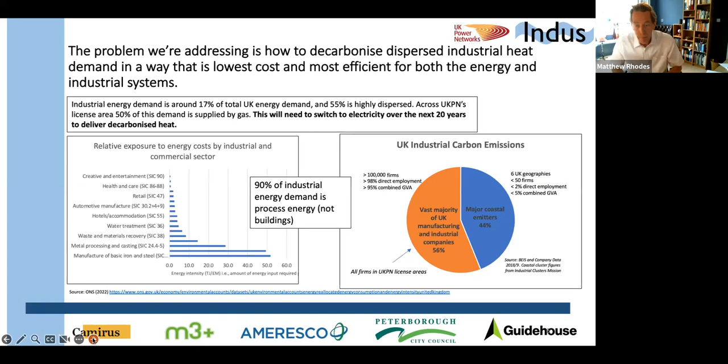So I'll hand over to Loukas now to give you UKPN's perspective on this problem. Thank you, Matthew. I think Matthew pretty much covered the challenges from a network perspective. If you have all the sites decarbonizing in isolation, then this is going to have a huge impact on the networks overall. And as a network, we are trying to be key enablers in the energy transition and not blockers. We don't want to say no to customers when they are asking for capacity for a new development or for an upgrade in an existing development.

So Matthew is going to talk to you about the Indus solution in a bit. At high level, it's going to be an offering from UKPN to industrial customers and developers to offer a path to decarbonization. But at the same time, it will be something that we're going to incorporate in our processes internally. So where we identify a requirement for a more coordinated industrial solution because of the Indus solution, the investment needs will also be incorporated in the planning processes, and we'll know how to deal with the increased demand over the next few years.

So we're talking about a product that will involve multiple parties. So it's not only the DNO process we need to understand, but also the requirements and needs of industrial customers and industrial developers. We also need to understand the challenges from the local authorities' perspective, and we are trying to get all the people involved in such a solution in the project in the alpha phase to have a holistic approach. So that was from me.

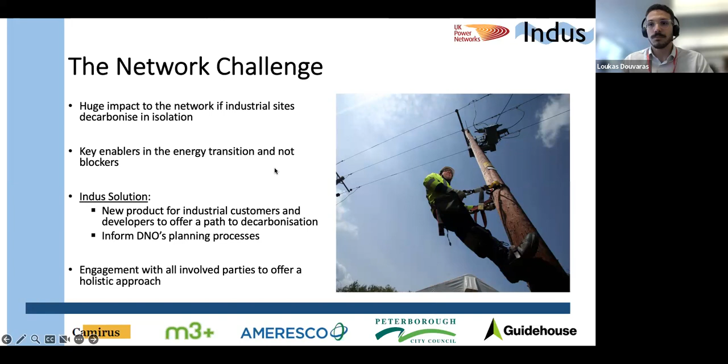I will pass over now to Matthew because I believe that Hannah had some issues with connection. So if we move on to the next slide, yes, I think it's probably Hannah trying to call me a minute ago to say that she was having issues.

So we've been doing this project focusing on Peterborough, Peterborough City Council as a local authority area, because as I'm going to explain in a moment, the strategy is to try and actually do one of these developments in a very specific place. So it's very important we engage with the local authority. Peterborough is a really good choice because they have declared a climate emergency. They've gone quite a long way down the energy road in terms of a local authority understanding the issues. They've got their own solar farms and so on. So they're very into this agenda in general.

They're also a growing economy with space to grow with some fairly meaty industrial activities. So there's a domestic appliances factory, Whirlpool, and Perkins Engines well established in Peterborough, and lots of growing industrial activity. So we've worked very closely with Peterborough throughout the project, and they're very, very supportive and enthusiastic about it.

It's a pity Hannah can't be here to say that herself, but she would have said something along those lines. So let's go on to the next slide.

Okay, so I'm now going to give you an overview of what we've actually got up to in the project, where we've got to, what the next steps are and how we hope to take it forward into alpha. So if we go on to the next slide. So we presented the problem in terms of a high-level challenge of decarbonising this particular demographic, these dispersed industrial sites across the licence area, and there are tens to hundreds of thousands of those across the country.

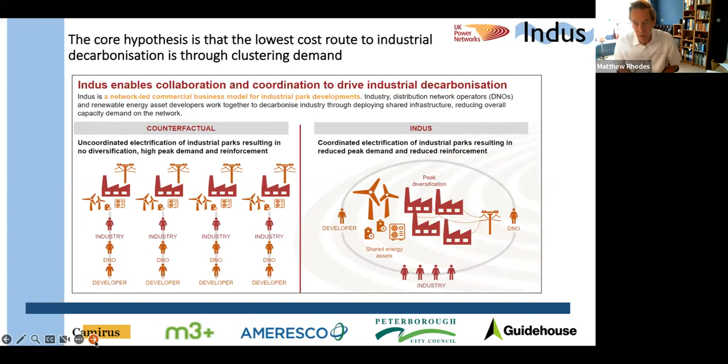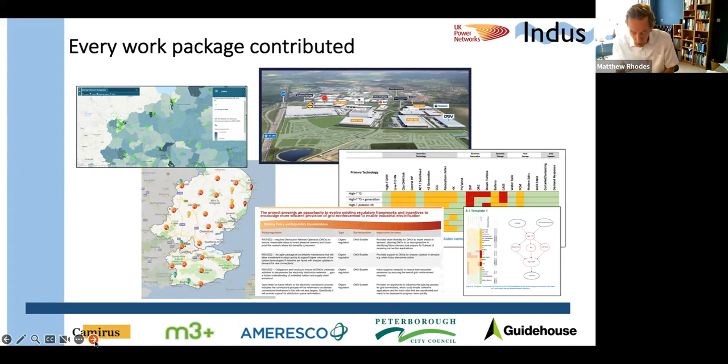The discovery papers have been really helpful to this project, and we've moved quite a long way without actually changing the core of what we're trying to do. So we're trying through the whole SIF process, if we can get to the alpha and beta stages, to actually intervene in one of these industrial developments.

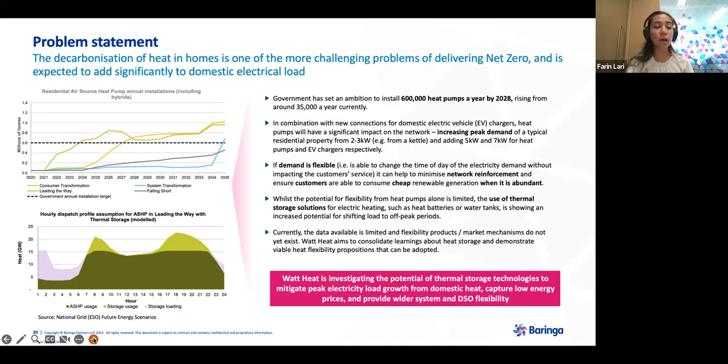More specifically, within the discovery phase, we wanted to, first of all, consolidate the data that already is out there, look at the technical feasibility of some of the technologies, old and new, that are in the market, and what level of flexibility they can provide, and understand the business case for this technology. That is really what is the value to the system and to the customers that these technologies can provide, and are they worthwhile for domestic customers. If we could go to the next slide, Hannah will take us through our approach. On to you, Hannah.

Hello. So yeah, as Farin said, we thought about a number of technologies as part of Watt Heat, including heat pumps with smart hot water tanks, but also more novel solutions like large space heating primary thermal stores, which are effectively just really big hot water tanks that allow you to shift your space heat demand as well as your hot water that you use for showering and stuff.

But we also considered especially innovative technologies like Tepeo's zero emissions boiler, which, because it has the storage capacity to store a whole day of space heat demand overnight, can fully offset the power draw from heating away from the electrical draw, whilst it also has another benefit of being a direct replacement for a conventional gas boiler. So some of the challenges for heat decarbonisation are overcome by that too.

So when we were going about modelling this, we thought about separate heat and hot water storage capabilities, which was really important so that we could consider the difference between a peak winter day when it's super cold and your space heating's at its maximum, but also the more classic day, for instance, today, where you're probably just going to use hot water and not even think about turning your heating on.

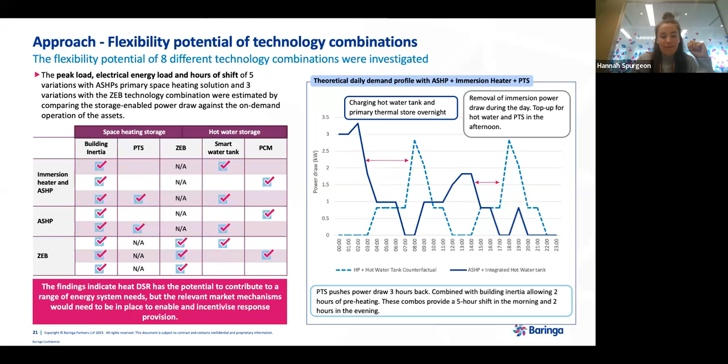Like Hannah mentioned, we assessed that there is great flexibility potential with these technologies, but there's also obviously a cost attributed to each of the technology combos, especially the ones that provide a larger amount of flexibility. And now to create a business case and incentive or any package that makes these combinations attractive to customers, we need to understand what the value is in terms of revenues, bill savings, and overall system benefits to really incentivize all the different parts of the value chain.

So to do that, we looked at each of the technology combinations first separately, and looked at the savings that can be achieved per household by taking advantage of time of use tariff through the flexible operation of the assets like Hannah just explained. In addition, we looked at the potential for the technology in participating in value streams such as DSO sustain.

TOU and DSO sustain together already provided a robust revenue and cost saving stack for the customers, but we went a step further and looked at the potential upside from dynamic curtailment and capacity market participation through aggregation that could really increase that revenue stream further. Our analysis showed that for all of the technology combinations, there's a reasonable payback period of something around 10 to 12 years for the most expensive cases and below.

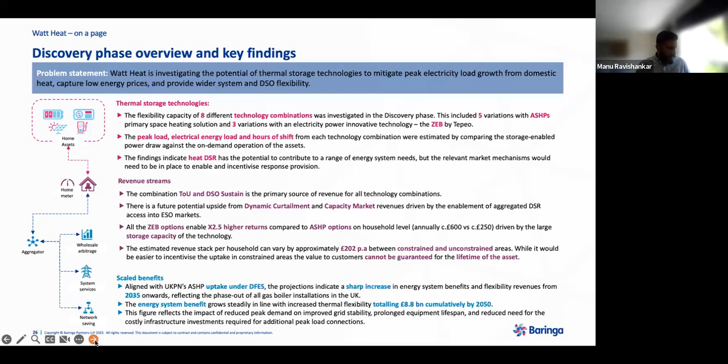Super. Thank you so much, Hannah. Yeah, great presentation. So I think I'm still waiting on questions from the audience. So maybe I'll kick off.

Just as a clarification question, really. When you talk about flexibility provided by thermal storage, do we mean the thermal storage itself charges, or do we mean the heat pump or the zero emission boiler operating flexibly to change the power load, and then heat is stored so that there's a smooth heat output, but then the power output? Just for clarification so that I understand.

Yeah, exactly. That's how we modeled it. We modeled it on the assumption that the heat demand of the customer is not changed, the power draw is changed. So the basis of our design was not compromising the heat demand of the customers.

Understood. So just maybe then a follow-on question. I guess you had a list of heat pumps, a zero emission boiler, etc. In terms of their own flexible operation, have you considered their capability to modulate as a factor in your criteria assessment? Can you clarify what you mean by that?

So if you're not running the heat pump on the same output, you're moving the heat pump load up and down, or if you're running the zero emissions boiler or something else, I guess all of the technologies have slightly different ways they deliver heat if you modulate them, or their lifetime, or their cost of operations or maintenance. Is that considered in your assessment?

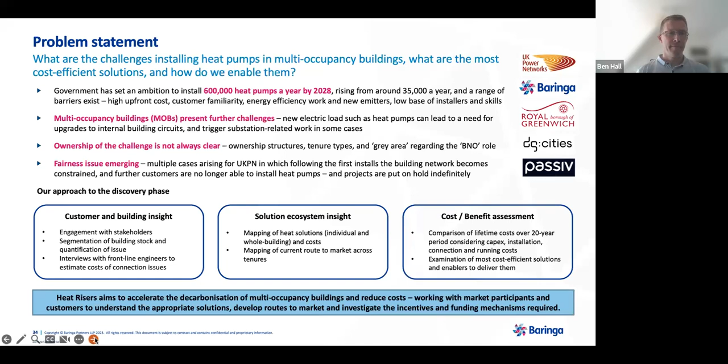So for us to properly understand the problem space, as Ben touched on there, it was really important to understand the property stock in UKPN's area. So we looked through loads of census and English Housing Survey information to work out just how many multiple occupancy buildings there were.

We and the census and English Housing Survey break down multiple occupancy buildings to be low-rise purpose-built apartment blocks, so that's anything 6 or less floors high, and also high-rise purpose-built flats, which is anything larger than that. And the final area was converted flats, which is basically a terrace property which was built as a whole house but later converted into many flats. So they're really prevalent in places such as London.

These types of properties make up 25% of housing stock in areas that UKPN serve, or 3.5 million dwellings. So if the problems of network challenges are going to be prevalent across a large amount of that building stock, it's obviously a really big area and a really big barrier for heat decarbonisation.

So once we had an understanding of the scale of the properties in question, we started having some really useful conversations with some of the area managers at UKPN about how common the building network constraints were, which turned out to be very common in multiple occupancy buildings.

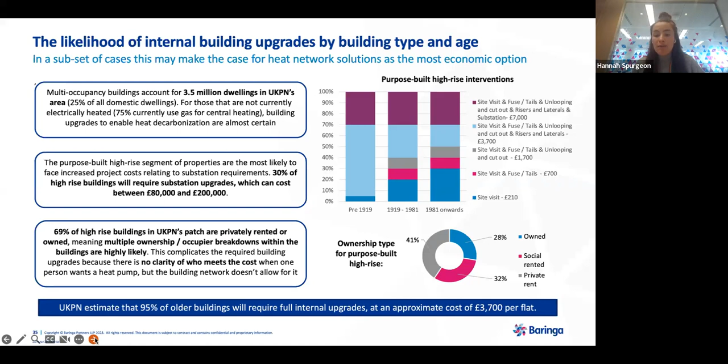It's worth noting that in social housing, the barriers could be slightly smaller because there is usually one owner, usually the local authority, and also communal level heating systems are installed more frequently, which could help to bring down some of the building upgrade costs, which I'll touch on in more detail in the next slide, if we could switch over, Manu.

So now we'd worked out that individual heat pump installations are likely to cause all these network problems, we also wanted to see whether other heat decarbonisation tech could allow for some of the costs to be reduced. So one of the solutions we explored was a coordinated rollout of air source heat pumps, which is where an entire multiple occupancy building would be decarbonised for heating in one go, and therefore you could also upgrade the entire building network at the same time.

Which enables, through buying heat pumps en masse, a reduction in the upfront capital for those technologies, which helps offset some of the connection costs. And our lifetime cost analysis, which considered the upfront and running costs over 20 years, indicated that this solution was often the most financially viable solution to still allow for heat decarbonisation in these multiple occupancy buildings.

However, you still have large barriers there of getting the engagement with the community and getting the works done, and who meets the cost of the internal building upgrades. We also considered ground loops, thinking that they might be really great, where a shared ground array allows for heat to be produced slightly more efficiently, though these are really expensive upfront and still require the building upgrades because you still need a heat pump of the same size within each property, which means that they had a very limited benefit with regard to cost.

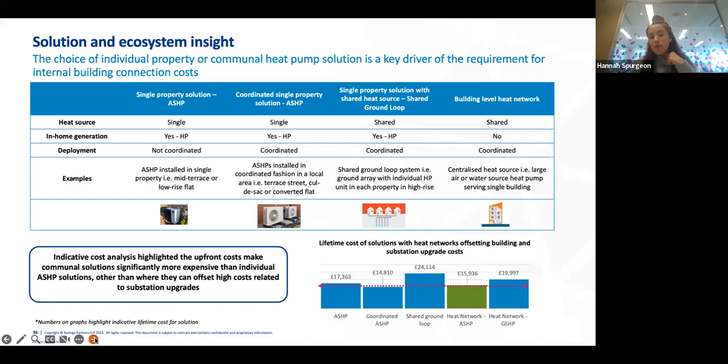Thanks, Hannah. So last slide. A lot of work's been done, but just to try and sum up very quickly, a bit of an eye-opener that most multi-occupancy buildings will require some form of internal intervention if you're upgrading from gas heating to electrified air source heat pump heating. In some of the older buildings, that can be quite considerable. We saw upwards of £3,000 per flat, and even more if you take into account substation interventions that can happen, some of which can be inside some of the large buildings.

Given that upfront cost is already a barrier and this can add 30% more, we're seeing that being a tipping point. We've got a number of examples, as Hannah mentioned, of projects that have been shelved. I mentioned the fairness challenge in the intro, but some of the reason this has come up is customers beginning to raise complaints with the network around how they can't have their heat pump because others have already got them, and that's not fair. If you play these challenges out and run the numbers together, going back to the policy target of 600,000 a year, applying that to UKPN's patch, potentially 1 million heat pumps in UKPN's area could be at risk of not being installed at all.

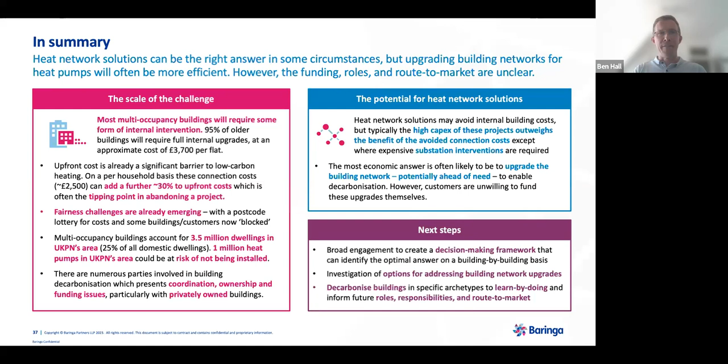That's the end of the slide. Thanks, Benny. Brilliant. Thank you so much, Ben.

Thanks, Hannah. Great presentation. I think a really good example of, if you look at bottom up for the heat decarbonisation challenge, there are risks that some segments get left behind, or it's too expensive to decarbonize. So really like unpacking that, and then putting some quite difficult questions on some of the things that you said, Ben, around actually cheaper for the network operator potentially to build, operate, and transfer off a heat network rather than reinforce. I think opens up some quite critical regulatory issues as well for us to think about how to decarbonize.